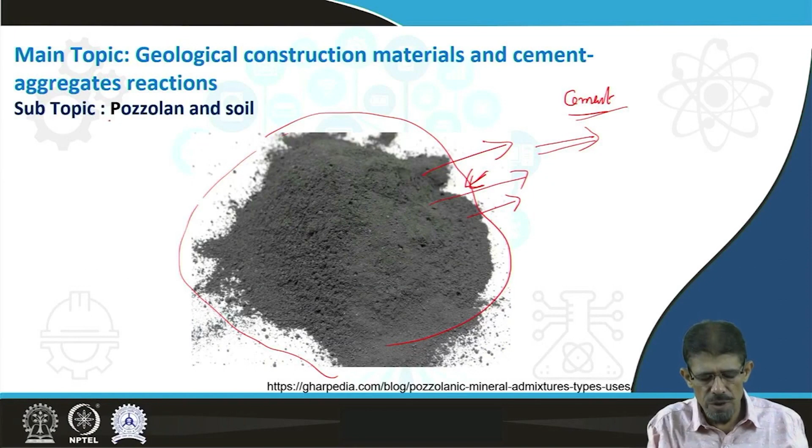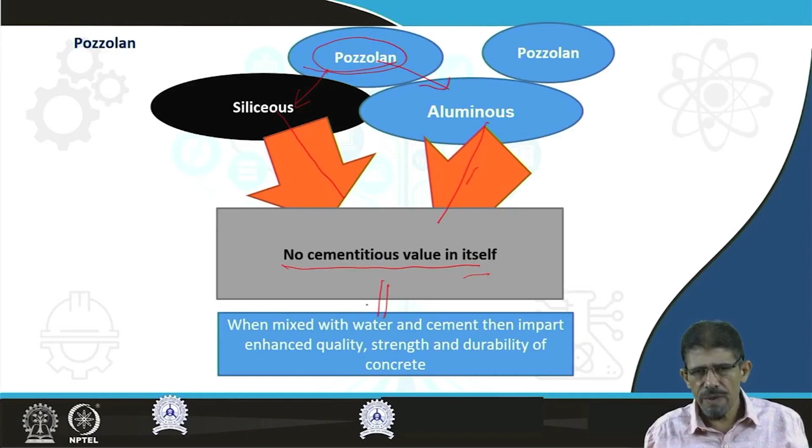First we are going to elaborate what a pozzolan is. Pozzolan is a material rich in siliceous or aluminous components. By itself it has no cementitious value. However, when mixed with cement and water, this material imparts enhanced quality, strength and durability to concrete. Why? Because after mixing with cement, water and other materials, pozzolans start showing cementitious behavior.

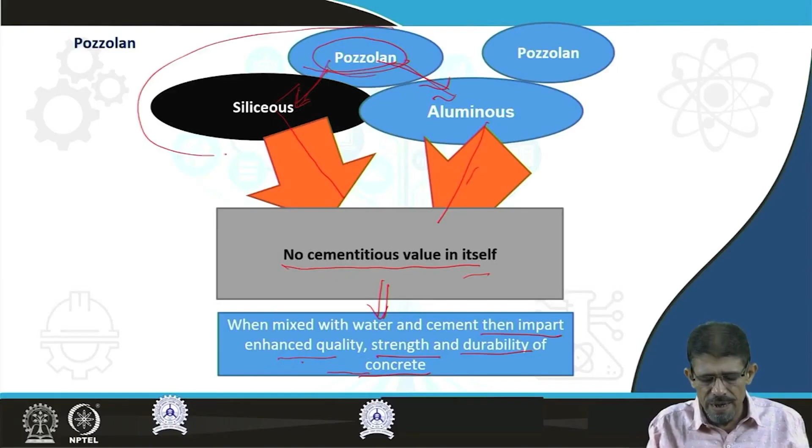As far as components are concerned, it is a material rich in siliceous and aluminous content. Therefore, this type of material is generally recovered from igneous volcanic rocks, rich in siliceous and aluminous components, mainly siliceous. Initially, rocks rich in siliceous components belonging to volcanic igneous rocks were considered pozzolan. People used the powder of such rock mixed with cementitious material to improve the quality, increase the quantity and save money.

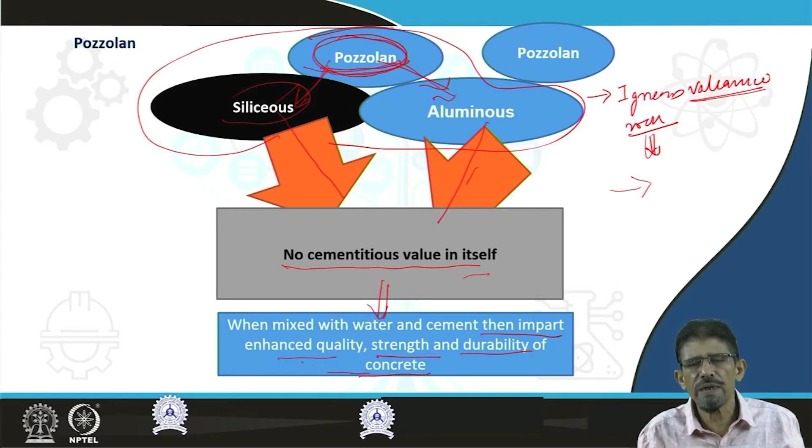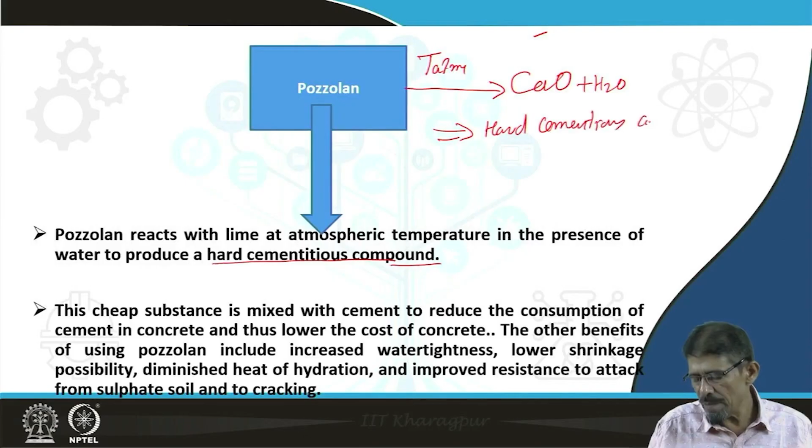Nowadays, with our knowledge of pozzolan, a number of materials are utilized as pozzolan, some natural, some industrial, like fly ash, burnt slag, furnace slag, etc. Pozzolan reacts with lime at atmospheric temperature in the presence of water and produces a hard cementitious compound. These characteristics make pozzolan specific and useful as a construction material.

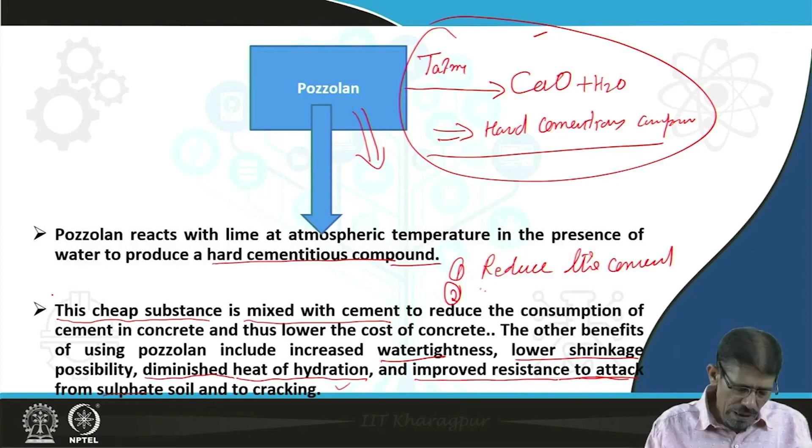This cheap material mixed with cement on one side reduces the consumption of the binder cement, and on the other hand enhances some technical properties of concrete: lower shrinkage, diminished heat of hydration, improved resistance to sulfate attack, swelling and cracking. Independently this material has no or very low cost and no cementitious characteristics. It reacts with lime present in cement at atmospheric temperature in the presence of water, because in concrete we mix cement, aggregate plus water.

So water is already present in concrete, and if we mix pozzolan here, the pozzolan and the lime present in cement, in the presence of water, interact and react and produce a cementitious product. As the system produces cementitious attributes, the low cost pozzolan mixed in cement on one side reduces the consumption of cement and saves money.

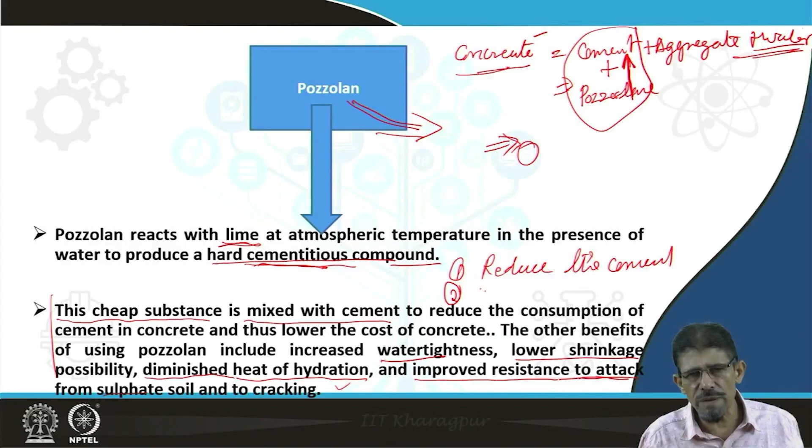On the other side, mixing pozzolan in cement improves certain technical characteristics like water tightness, low shrinkage, diminished heat of hydration, improved resistance to chemical or sulfate attacks, resistance to thermal cracking, and resistance to alkali aggregate reaction. Therefore, we can say that pozzolan is a very profitable material utilized for economical as well as technical benefit.

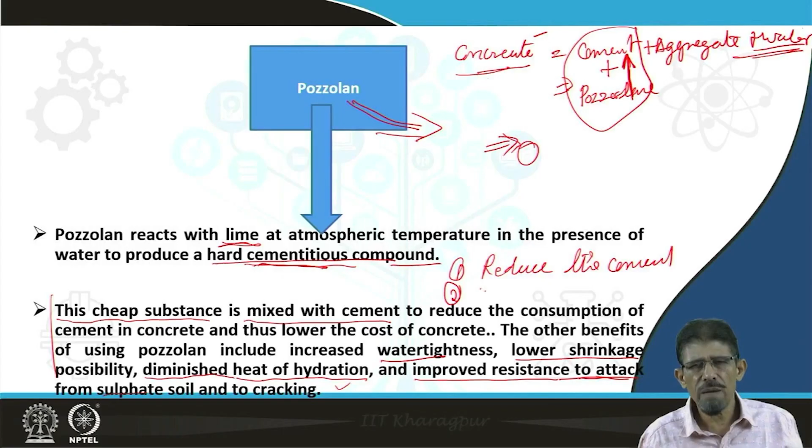Now, the materials which can be utilized as pozzolan can be easily divided into two categories: first natural, and second industrial. Natural rocks or materials rich in siliceous or aluminous components can be considered pozzolanic material. The first and most recognized material is volcanic ash, and tuffs associated with volcanic rocks. Volcanic ash and tuffs are rich in siliceous components, and their powder has been widely utilized as pozzolan since the historical past.

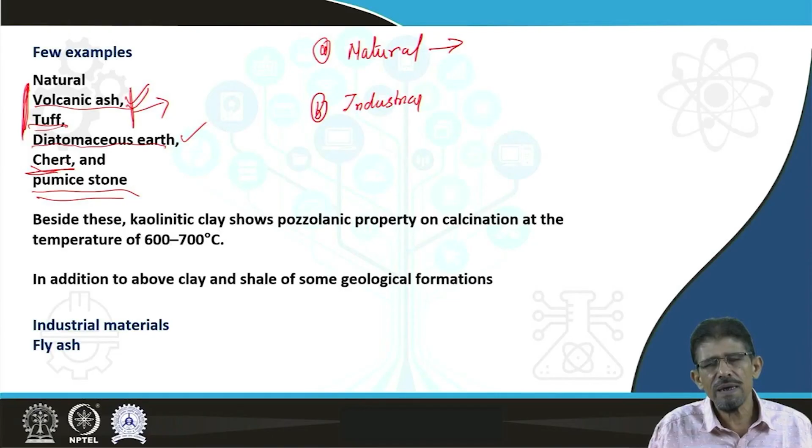In addition to this, diatomaceous earth is also famous as a pozzolanic material. Chert is rich in siliceous component, and the powder of chert is utilized as pozzolan. Pumice stone is also utilized as pozzolan. Besides these, many clays, shales, siltstones and other rocks are also utilized as pozzolan.

The concept is very simple. Certain materials react with lime to produce cementitious, meaning pozzolanic, characteristics and are considered pozzolan. Certain materials like clay, shale and others, calcinated at a temperature ranging from 600 to 700, start showing cementitious characteristics and can also be utilized as pozzolan.

In addition to this, various geological formations show huge pockets of shale, silty sandstone, shelly sandstone belonging to Vindhyan, belonging to Cuddapah, belonging to Siwalik group in geological term, are showing some pozzolanic characteristic at certain temperature condition.

So as far as this natural pozzolanic material is concerned, volcanic ash, tuffs, pumice stones, diatomaceous earth, chert, and certain shale, certain clay are considered as natural pozzolan. In addition to this, we have industrial pozzolan.

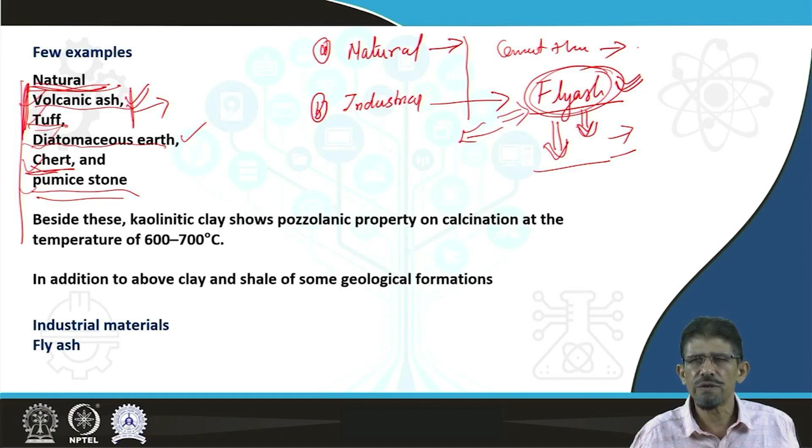In addition to this, blast furnace slag also we are going to utilize as a pozzolan. Various chimney ash we are going to utilize. Various other residue products subjected to various level of temperature we are also going to utilize as pozzolan. These we have already discussed here.

Siwalik clay stone imparts pozzolan character after this temperature, 871 degree calcination. In Indian context, we are very rich in pozzolanic material in Deccan Trap.

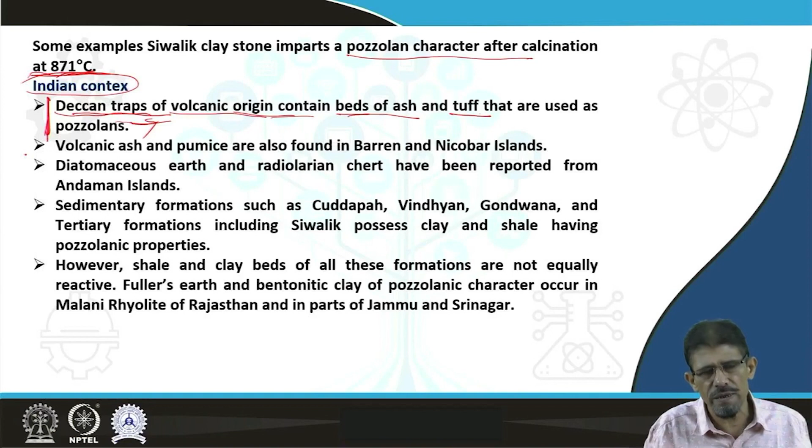Deccan Trap is volcanic in origin, well known, world famous, has various flows, and these volcanic origin beds contain ash and tuffs, and that ash and tuffs are considered as pozzolan very early in our childhood time. Nowadays also, the concept of pozzolan term or pozzolanic material comes from these volcanic tuffs and ash.

Then volcanic ash and pumice are also found in Barren and Nicobar Island. Diatomaceous earth and radiolarian chert reported from Andaman Nicobar. Sedimentary formations such as Cuddapah, Vindhyan, Gondwana, tertiary formations including Siwalik, possess clay and shale that have a pozzolanic characteristic, but after calcination at certain temperature.

Shale and clay beds of all these formations are not equally reactive, but calcination at different temperature is going to make this clay and shale as pozzolan. Although clay is also very important for other purpose. So here particularly in context of pozzolans we are going to utilize a very low cost material to save money, because engineering geology is a technically and economically both component approach.

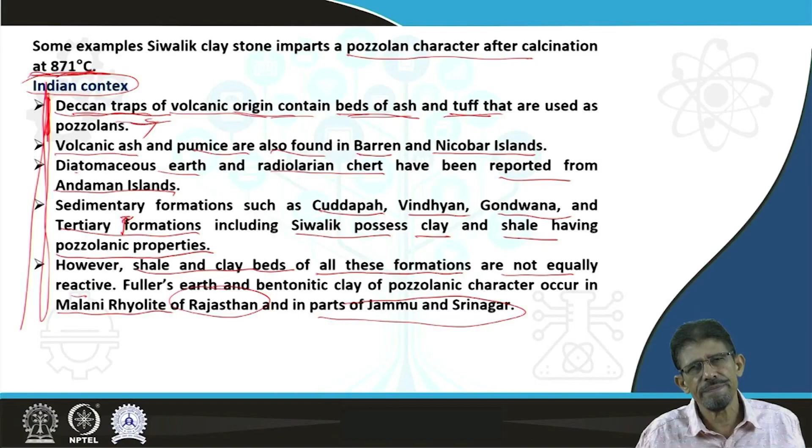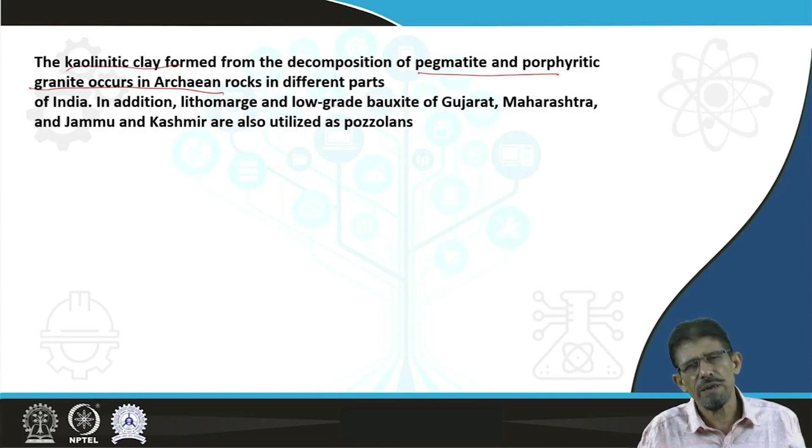Many others also, some clay and other, but clay is still a costly material and utilized for various medical, cosmetics and many other purposes. So we generally prefer low cost material, lower than cement. Next important material engineering geology is applying or working with is soil.

Soils are various types. Soil we are utilizing as a subgrade in case of road pavement, airport, many building foundations, dam foundations, bridge foundations. Keeping importance of the soil, we are going to refer to the soil as earth in engineering geology or engineering context. Where we are going to discuss about the soil, in honor of soil we are going to use term earth. For example, earth dam. Earth dam means soil dam.

Soil is a very interesting material. People of various disciplines are interested in study of soil, like agriculture scientists, civil scientists, soil scientists, even medical scientists. Various researchers are going to see the soil from different points of view. As for our concern, we are also going to see soil in our point of view.

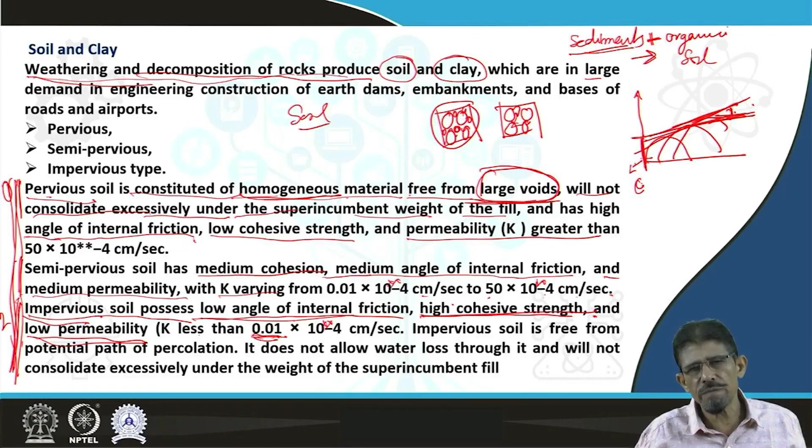In this way, by knowing the compressibility, consolidation indirectly, the cohesive strength, the angle of friction and the permeability, we are able to consider this for various purposes, as a foundation for construction of dams, buildings, bridge foundations, and road pavement as a subgrade, etc. In addition to this, we can develop some earth dams, earth houses, etc.

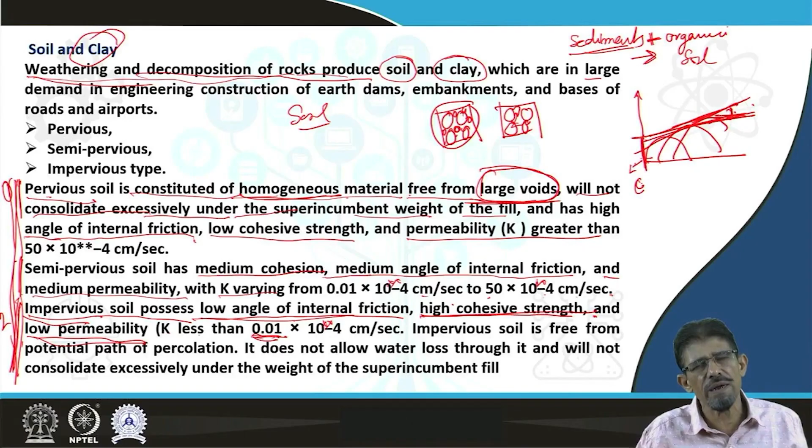Next is clay material; clay present in soil, and we recognize it as clay soil. Clay soil is very important, and we require it in construction of embankments, retaining walls and abutments. Soil with more than 50% clay particles is recognized as clay soil or clay. If it is compact in nature, then we consider it in the form of the rock argillite. Clay is constituted of non-clay minerals such as quartz, feldspar, calcite, mica, and clay minerals such as kaolinite, illite and montmorillonite.

If you see these clays through XRD, you can get certain types of peaks. In any soil or clay, quartz is always present, calcite is also present, some feldspar is also present. Why? Because feldspar is directly or indirectly the parent of the majority of clay. Some famous clay minerals are kaolinite, illite and montmorillonite. Montmorillonite shows maximum expansion in volume after interaction with water. It means if strata containing montmorillonite clay receive water, they start bulging; this chemical interaction is recognized as swelling. So montmorillonite is very sensitive to swelling.

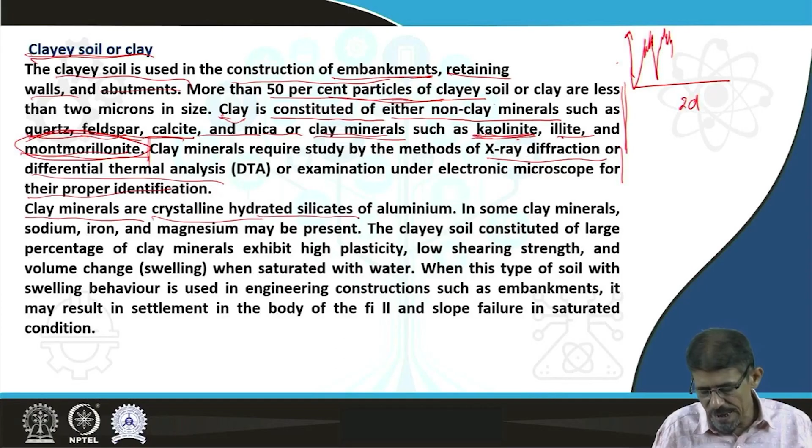For analysis of clay minerals, we involve X-ray diffraction, differential thermal analysis and others. These are costly analyses and slightly beyond our scope. We are not so interested in the chemistry; we are more interested in the mechanical or geotechnical response of soil or clay to external causes. Although, as per demand of the topic, clay minerals are crystalline hydrated silicates of aluminium. A clay mineral is actually a combination of octahedra and tetrahedra. In certain cases there is a gap.

In this gap, the water is going to enter and going to enhance the volume of clay minerals. Therefore, montmorillonite is going to show expansion in volume and swelling. In some clay minerals, sodium, iron, magnesium may be present, and clay soil constituted of a large percentage of clay minerals exhibits high plasticity, low shearing strength, and volume change, swelling, when saturated with water.

Water, the interaction of soil and water, or soil and earth. Earth means soil. Soil and water is very interesting. In every step of engineering geology or civil engineering construction or any development work, we are going to face soil and water. Water is going to interact with soil. If clay mineral is present, it can show some swelling, some change in plasticity, some change in liquid limit. These are engineering properties of the soil. We may study them if time requires

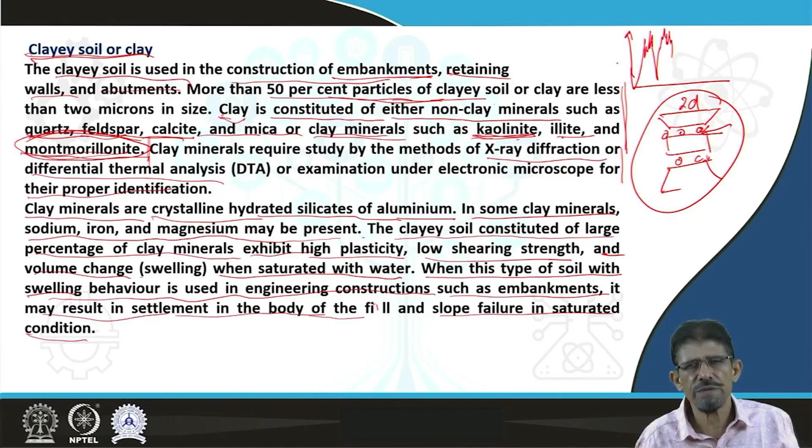Here I have collected from this reference, 1968, given in the book Engineering Geology. You can see here some of the components. Some typical soils, such as black soils close to volcanic terrains. In India, we can see them near Indore, Khandwa and others, the area dominated by Deccan Trap, weathered in nature and come in the form of black soil. And black soil is very important from an agricultural point of view. The black cotton soil has a clay fraction of 55%, close to clay. The liquid limit is 73, where the plastic limit is 40.

However, in case of the clay from the delta area like Sundarban and others, the clay fraction is more, 66, liquid limit is more, 80, and plastic limit is also more in comparison to the black soil. In the clay from the sea coast area, clay fraction is 80%, liquid limit is 90, not percentage, and plastic limit, it is index 63.

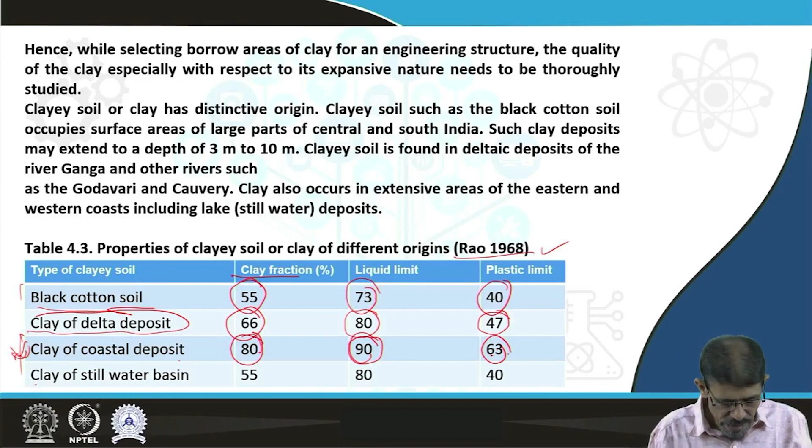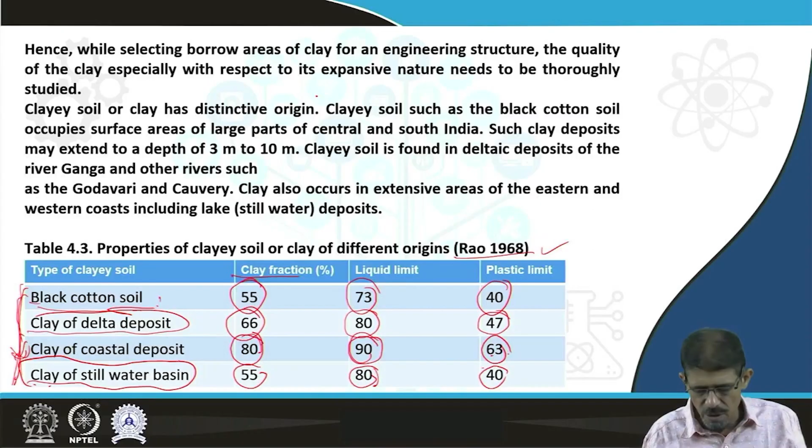Then clay of still water means clay from the lake and pond and others. Then the clay is 55%, close to the black cotton soil. However, the liquid limit is more and plastic limit is the same, close to the black cotton soil. It means the saturation of clay present in a lake or pond may be the same as the black cotton soil. Here in case of a still water basin, the clay may interact with some nutrients, vegetation, and degradation of vegetation. These are some details beyond our scope, only for your knowledge.

Friends, these materials can be well studied from the book written by Subinoy Gangopadhyay, Engineering Geology, a very excellent book published by Oxford University Press, and then take help of the standard books on Engineering Geology written by F.G. Bell, Waltham, and Kesavulu, along with some materials concerned with agricultural science and other material available on the web.

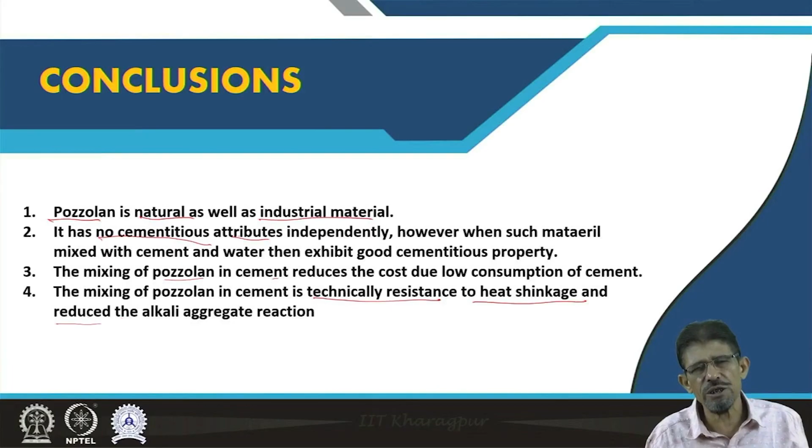Friends, as we have already discussed, pozzolan is a natural as well as industrial material. It has no cementitious attribute independently, but when mixed or interacting with the lime present in cement, in presence of water at normal temperature and pressure, it is going to show cementitious property, and this is the main mechanism behind the working of pozzolan. The mixing of pozzolan in cement reduces the cost through reduction in consumption of cement. And it is technically resistant to heat shrinkage, reduces alkali aggregate reaction, chemical attack, gives heat resistance, and many more.

Dear friends, in this class we have discussed one of the very important materials which is going to reduce the consumption of cement and provide some safety to our pockets. Then another interesting material is soil, and in engineering geology we are going to widely interact with soil at different levels, as a ground for development of road alignment and many structures, and construction of some structures like earth dams and others. Thank you very much.